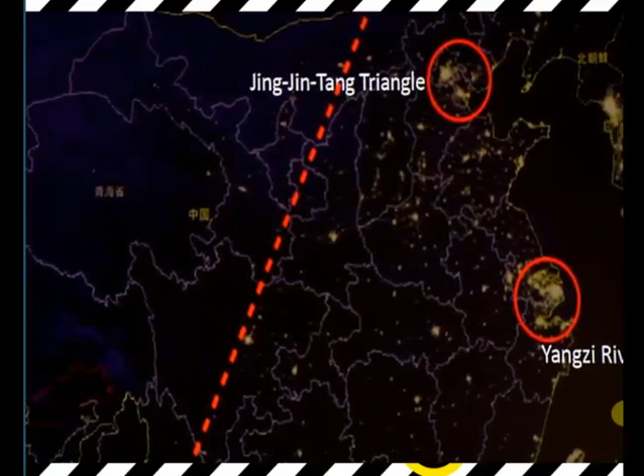Start from here. I would talk about this map. I also grabbed it from Google Earth. It very clearly can tell the situation in China geographically. You see this dash line actually divides China into the east part and the west part. And actually 70% of the people and also most of the major cities are located in the east side, and the west side is mostly wild land. So this is China, it's a reality.

And also we'll say almost half of the population, or 30% of the population, actually live along the coast, particularly three major regions. The top one is Beijing, Tianjin, Tangshan. It's a tri-city area. All the political, education, cultural, financial, everything is in the center, the strongest one. In the center, it's called the Yangzi River Delta, headed by the city called Shanghai. This one has the strongest economy because it has a very large group of cities, more than 40 of them. Most of them have populations close to 1 million. Of course, Shanghai has close to 20 million people.

And this one we call the Pearl River Delta area, which has several major cities. We heard a lot of talk about Hong Kong, a major one, and also the adjacent border city, which is called Shenzhen, where we are located, and to the west Guangzhou, Zhuhai, and Macau. There is also a city called Dongguan in between. So there's a very big economy, the strongest in China for its industrial part. The red part is the city called Shenzhen, and Hong Kong is right here.

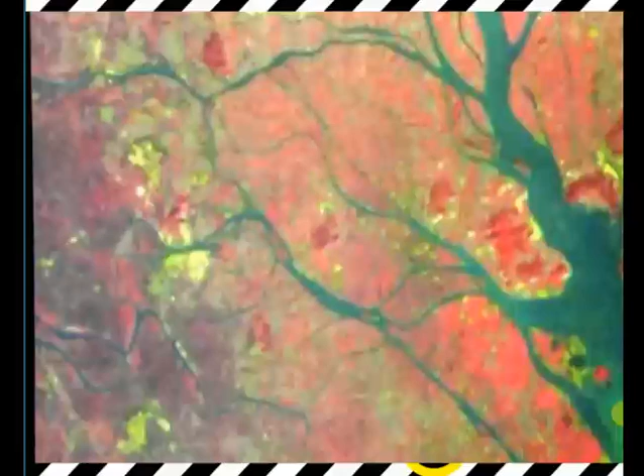I took this picture from the book, and it shows 1985. The yellow part is showing the urbanization for the whole Pearl River Delta. This is Shenzhen, it's very much developed, and this is the Guangzhou area.

When they finished the book, the time was 1995. You see Shenzhen has expanded its city boundary into the inland part, and the city also expanded along the Pearl River area. So I asked my guy to use a similar way to show what happens right now. You see Shenzhen is very much like this, and all the cities are actually connected.

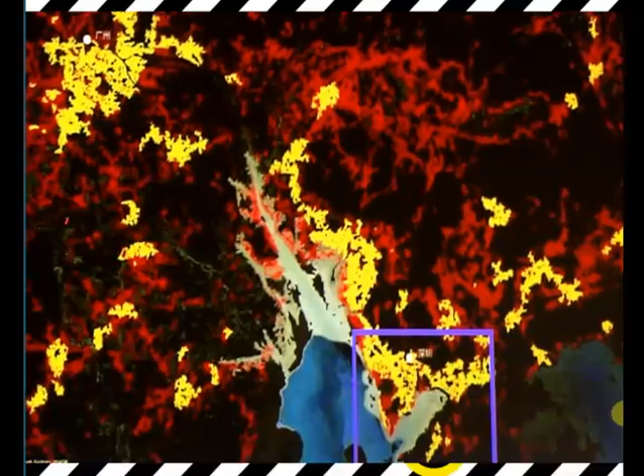Actually the red part is also early urbanized area. So it's again and again doing the thing. And then, enlarging this map to the Shenzhen area, this is Shenzhen, and this is actually Hong Kong. You see a large part of the land still remains undeveloped, but Shenzhen has covered almost everything.

When we zoom into this Shenzhen map, we'll see there is a lot of large development still going on. This is Hong Kong, the first border control area. Shenzhen was first developed in the 1980s and 1990s. The Luohu City Center in 1990 was the main center.

Then from that time on, it went west, and we founded this CBD in 2000 and started building it for like 15 years. It's almost done. Then it pushed into the Nanshan CBD, and right now we have a very aggressive plan for the Qianhai New Town, with 25 million square meters of construction to be done in almost 10 years. It's a tremendous work to do.

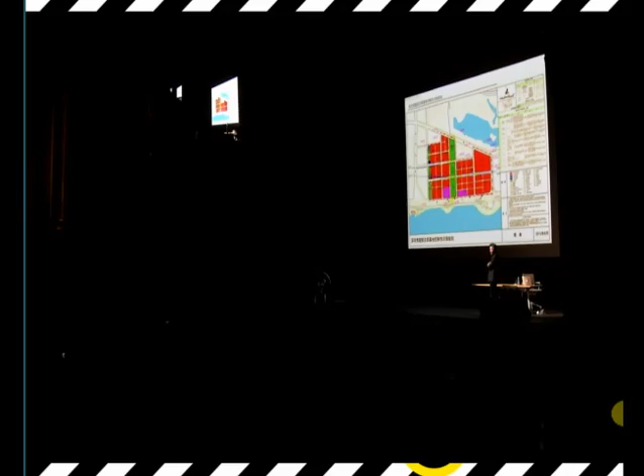This is some kind of fast, massive development, and it's still happening, and it's still strong. From day one when we set up the office, returning from the United States and coming to Shenzhen for the first job, we immediately found some very interesting phenomena. The urbanization is very strong and very obvious. So we started to observe the city constantly.

We call the very early phase the generic city phase. During the 1980s, it only had 500,000 registered people, and 10 years later it grew to 1.7 million. The large development started until 1997. We had already grown to 6 million people, and large infrastructure like highways started to be built in the city. So we had 9 million people at that time.

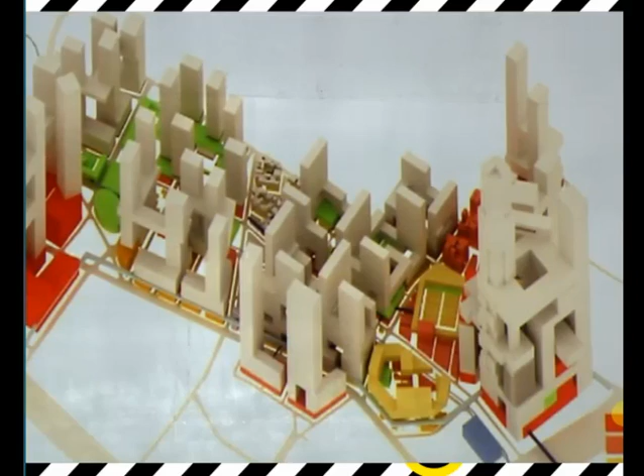The originally designated special economic zone area is already full. So the city started an urban regeneration period, which brings density problems. The city developed so fast; originally we thought we wouldn't get so many people in, so the FAR was set at 2.0 to 2.5. They thought that was already too dense, but right now there's a big issue: the government planning bureau doesn't actually limit any density.

They don't have a limit now. So they are starting to think, is it time for what's called a new density? What's the new density? Can we reach a density of 5? Or can we reach an FAR of 10, even higher? So this is something we keep thinking about.

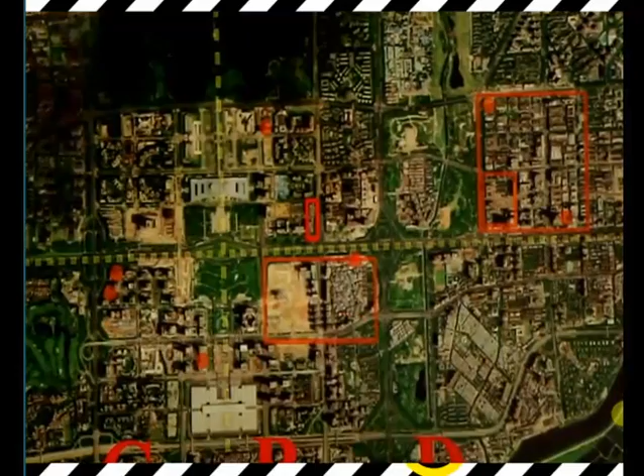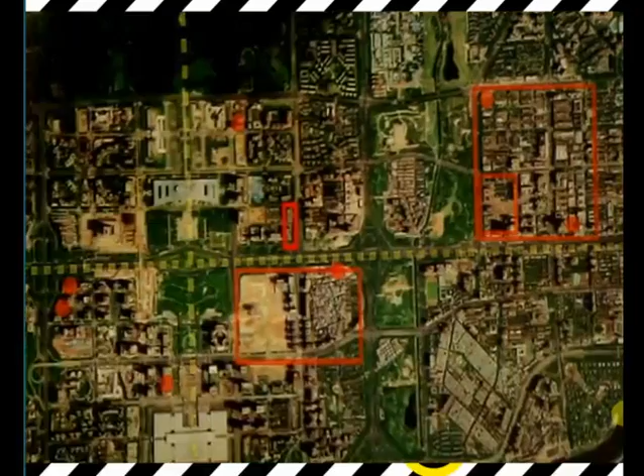I'll just take the central CBD area as an example. We did a lot of work on this one. The red dots are the buildings we have built; the rectangular lines are the places where we did urban design and some large building complex design. Most of them are finished or under construction. There's a central axis for the CBD, and there's a small hill, 100 meters tall, where you can actually overlook the CBD area.

The year 2000 was the second year we went to Shenzhen. You see, the CBD is empty. No one wanted any piece of land. No one believed this was going to happen. At that time, the planning said an FAR of 2.5. It is partly residential and mostly office buildings and government office buildings. The civic center was built 5 years later, with some museums and music halls, and some buildings started to be built.

At that time, I talked to the head of the planning bureau and said, probably this FAR is too low. I think 3 to 4 would probably prevail, because we know Manhattan and others all have very high FAR in that area. The guy said, no, we don't need it, that's enough. And then 10 years later, they raised every piece of land from an FAR of 4.0 to even 7. I personally did part of the urban design, which is designated for 7.0 now.

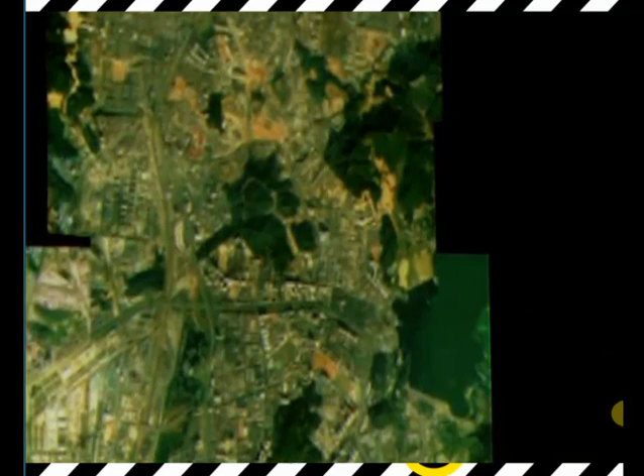So in year 2005, we started a study. We chose four villages to research what we can do to preserve this rich area. So this is the place we chose, just as the picture shows. And this is the one we selected in 2005. And when we had done the research, this was already gone.

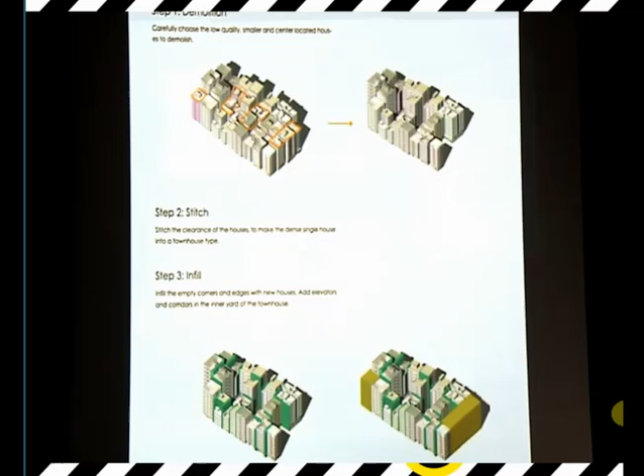And the way we thought is probably we can pick up the place. We can take off some of the buildings and make the buildings fill up those gaps, and also build something on the top of it, so that we maintain the same density, and also we can increase some FAR. Then we add a little bit, add a little elevator. Then we do some rooftop thing, and also we can develop a second

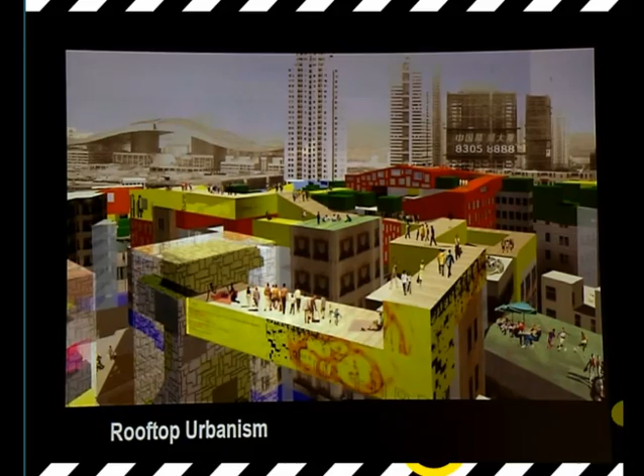fire exit route. So this is something we did all by our own. We call it rooftop urbanism. And we try to kind of make this a nicer area, so maybe we can preserve this area. But unfortunately, this is not going to happen year by year.

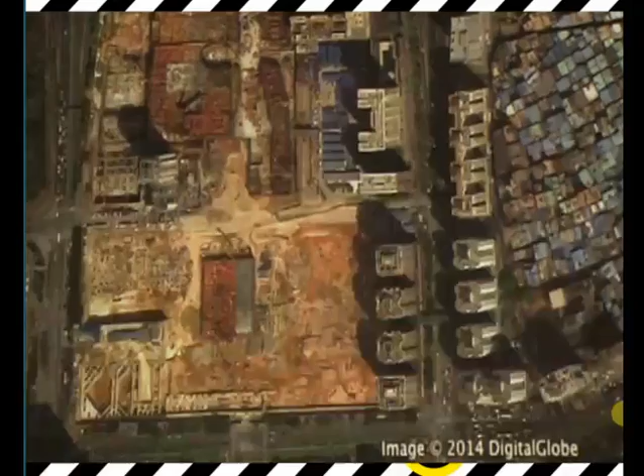So this is starting building two major shopping malls. Last year it was already done like that. So you see, the buildings have already gone up. It used to be a very low urban village, but the research actually gave us a lot of thought, and also we talked to lots of people about this one, and gave them some visual idea. Say, okay, what's going on? There used to be this kind of so rich and crowded area, suddenly it becomes the place no one will live in.

A couple million people will have to commute from the suburb into the city. There's no way. The subway and bus lines are already very crowded. This is not going to happen. And they are going to replace the urban village with those high, very ugly apartment buildings, and the high price.

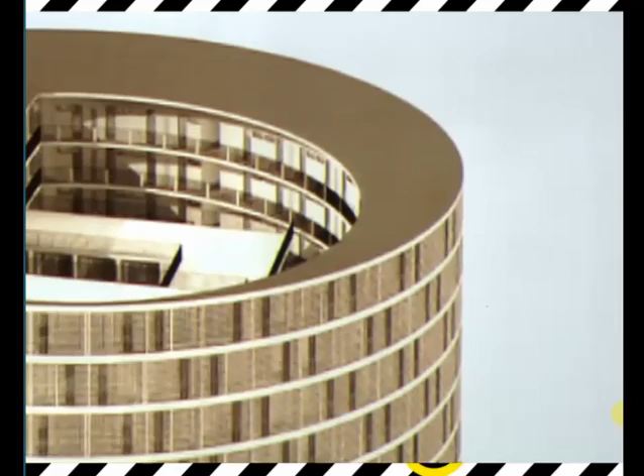And we continued to do the study and research, and finally we got a chance to find a project, actually a client, and I thought maybe we can borrow some of the old vernacular ideas, like this one called the Tulou in the southeast part of China. Very nice, very strong inner spirit, closed space. So this is very much like co-living, a collaborative kind of housing. It's very unique. So we thought maybe we can borrow this idea to see what we can do.

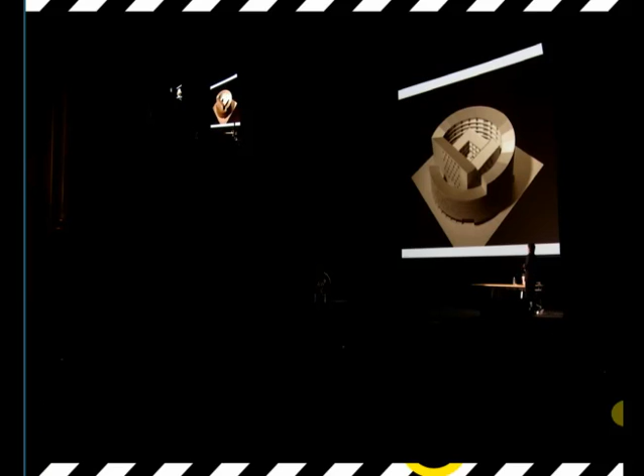So this is something we started, and we tried to combine the Tulou idea and the urban village's kind of chaotic, very rich life introduced into it. And we went through several rounds of imagination, and then we finalized the design, trying to do a very monolithic type of building. The reason is we think maybe this is something we can do, what we call colonize, or like copying this building into the city, in the city center.

So, for example, there's some government-controlled free area, like here, a leftover area. It doesn't have a very high land value. So we can build something like this. It doesn't really have a requirement of the environment. So we can build this kind of thing at a relatively cheaper price. So we finally get an FAR of 1.5.

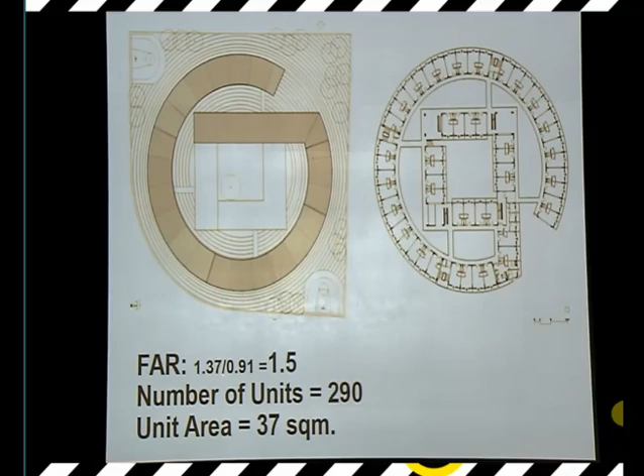But density is not just about the pure physical FAR. Actually, we got 290 units. Each unit, we counted, can house four people. So with 37 square meters, four people, two couples, share one unit. They have a separate bedroom. So this is already a big improvement. This is the typical floor plan we are developing.

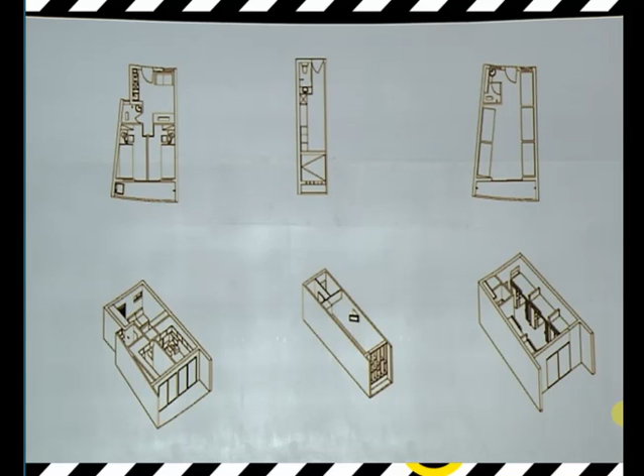The first project is for people coming to the city who want cheap rental housing. So this is what it looks like. From the top it very much resembles the traditional Tulou vernacular architecture, but we use modern ways of organizing everything. This is the entrance, so we introduced open space, open shops, and a community area.

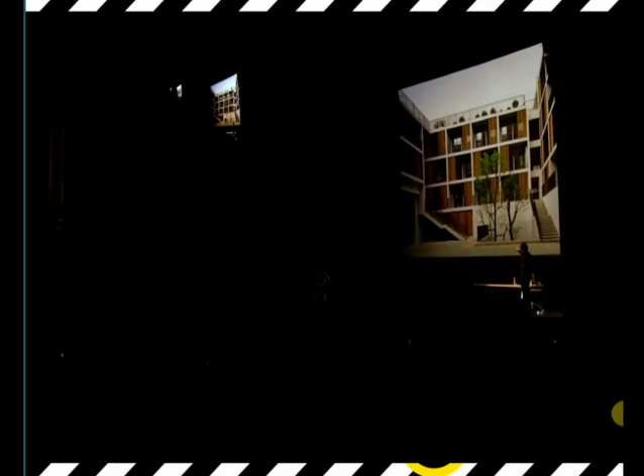This is the central courtyard, and these are pictures I took last month when I went back. You can see it's really full of life. The people seem happy living inside. Some people have been living here from the very beginning, and their children were born here. It's a very interesting area.

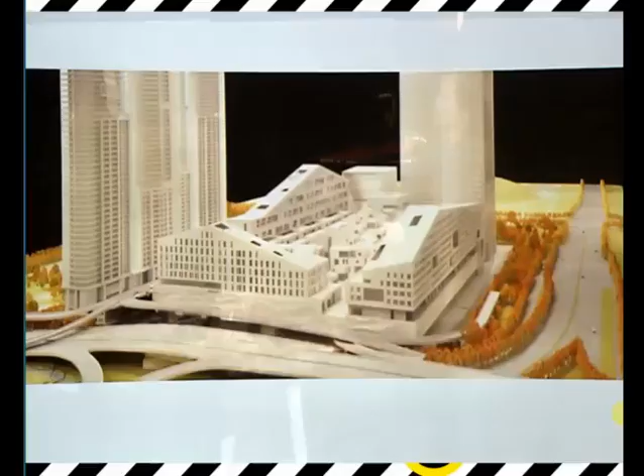Housing isn't the only thing we could do - what happens with a larger commercial complex development? This is something we designed two years ago, and now it's under construction, almost reaching the level shown here.

We got this commission - it's like SOM did these two big towers, this Hong Kong office did the residential, and this Miami firm called Arquitectonica did this shopping mall, with a footprint of about 30,000 square meters. So they can also build something on the rooftop of the shopping mall.

So this is the idea we got - it's right here. You can see the two parks already; it's situated between the two parks. This is very nice.

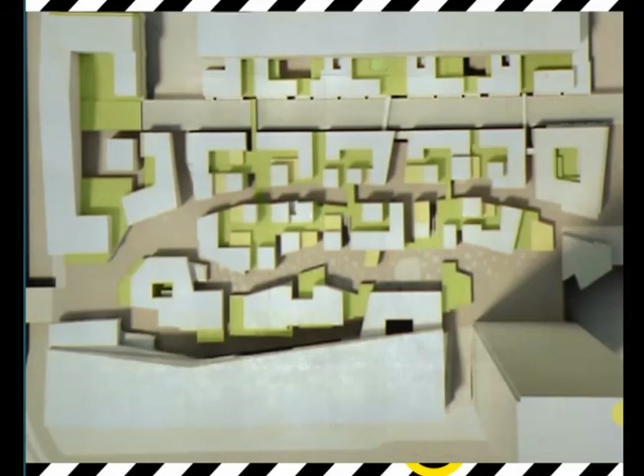We even have a two-story shopping mall that gives us the chance to bridge from the rooftop between two small hills. So we're making the central part like a small town, developing it as a Soho office building and commercial area, something like this.

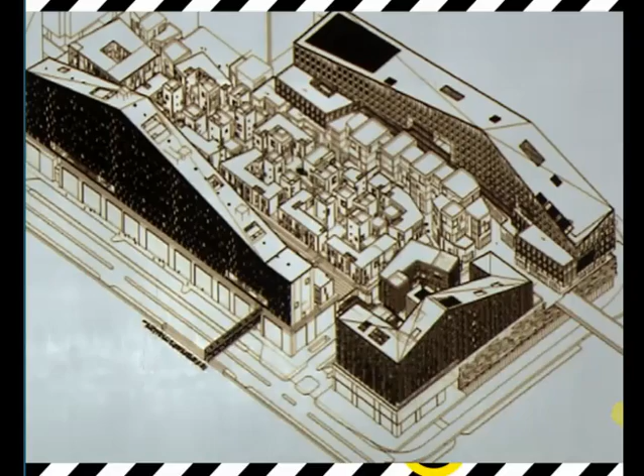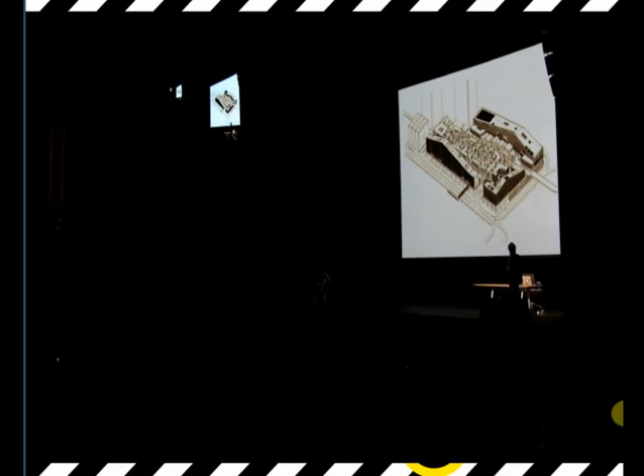This is what happened - we borrowed this urban village idea and tried to upgrade it into something better, even into a fancy place. You see this office building here, a hotel, and another office building that's a residential loft. This is a hotel, and in the center are small lofts and open-air shopping streets - a very rich kind of area.

We thought this is something that could only happen in China - once density reaches this requirement, they start building things on top of the shopping mall. You can clearly see this from the section - this is the third level. We have lots of different small-town-like things happening on top of it.

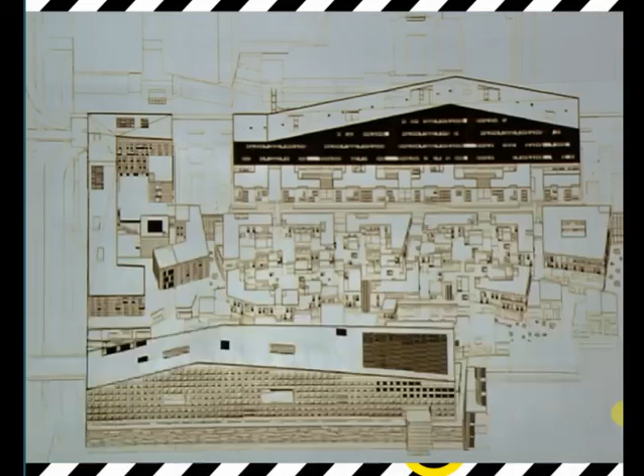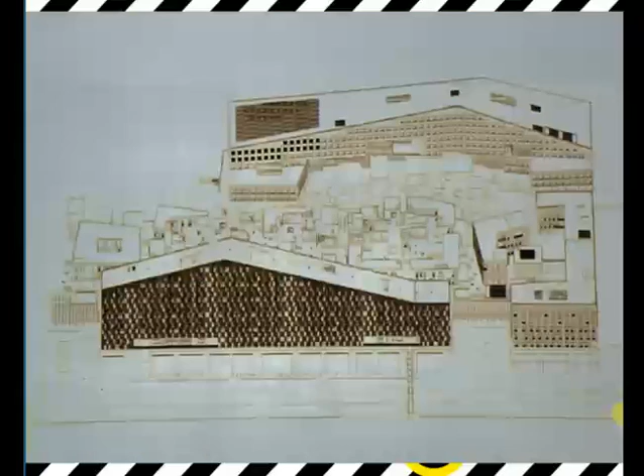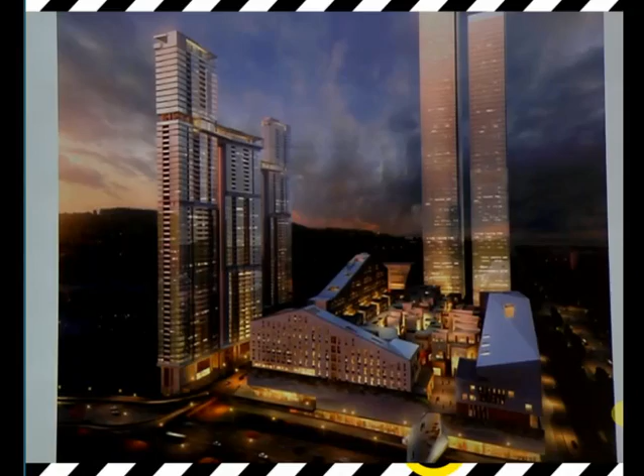So this is something we're working on - it's under construction already. We also developed a new building type, something we're really excited to see what happens with. We thought this experience was successful.

So we started thinking about large building complexes in already built-up areas. This is the area we're working on. The client came to us - they had already built a shopping mall and some other buildings, but thought the density wasn't high enough. They asked what density we could reach, and gave us this area to work with, where the shopping mall and other places are already settled.

This is more conventional. Further, we thought - this used to be a light industrial area with a lot of 5-story industrial buildings like this. So what if we stack them up, make them smaller, and combine them into a huge massing, something like this?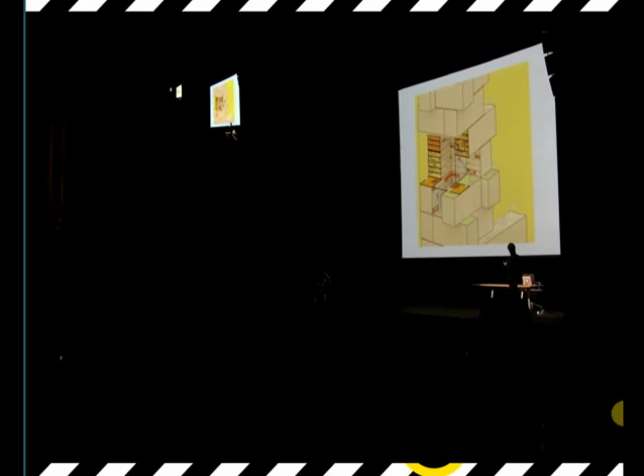Then we stack them together and think about public areas that can be built across levels, mixing residential with work and commercial space, creating a kind of sky lobby or sky atrium.

This is also a proposal. You see a lot of voids and atriums that can be put in here. Yeah, this is the second proposal we've done, and later we'll think maybe we can do something more simple and stronger.

So we did the third proposal called the Mega Tower. This is something where we have several different buildings instead of just a single building. Maybe we can put different building functions together. We can dig out different shapes of voids that become an atrium, an area, and enlarge the footprint, mostly combining 4 high-rise buildings together to form things like this.

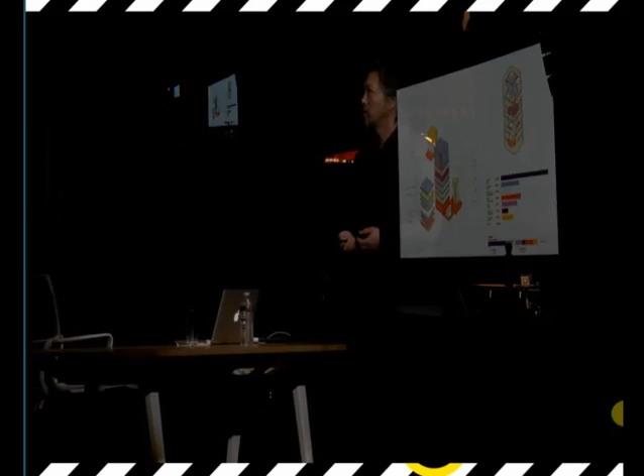So we have multiple different functions, and we use the buffer zone for public use, and also introduce a lot of social life. We try to do something like this. For example, we made this picture and said, okay, this is very high up, but it's quite nice. Maybe we can do this kind of life to solve the density problem, and also maintain the high quality of life and the work environment.

So this is something we've done the study and research on, gave to the client, and finally we got an exercise putting all the experience we have before together, and we got this large urban design proposal, and how to deal with a large urban village like this.

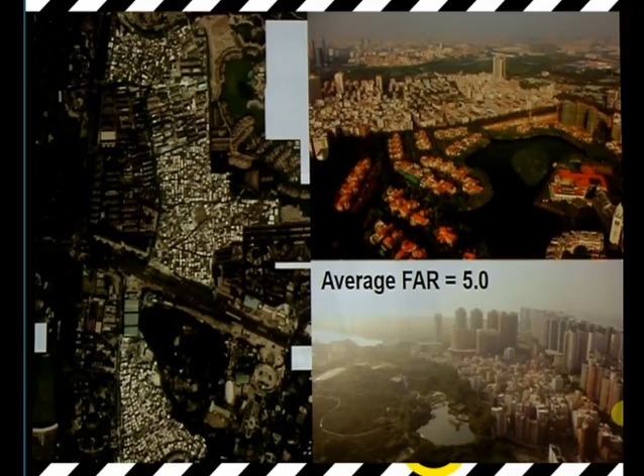This area is the highlighted area. It's called urban village. It's not totally developed yet, and it's already got a FAR of 5. The developer coming in tries to just demolish everything. They build something like this.

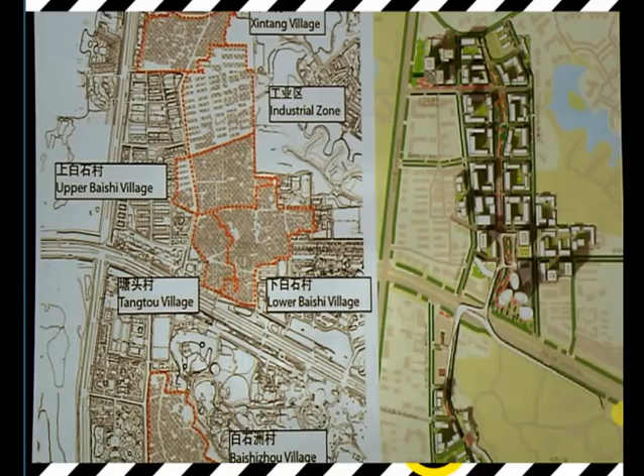This is the master plan done by a very famous American design firm. Yeah, this is going on.

And then we just ask the question: okay, for this type of development, what do you gain? What kind of problem can you solve? Of course you can solve the GFA needs, large area you can do, but what you cannot do is continue the cultural context.

You cannot think about social upgrade with this kind of master plan. And of course, you cannot have diverse functions like the urban villages used to have.

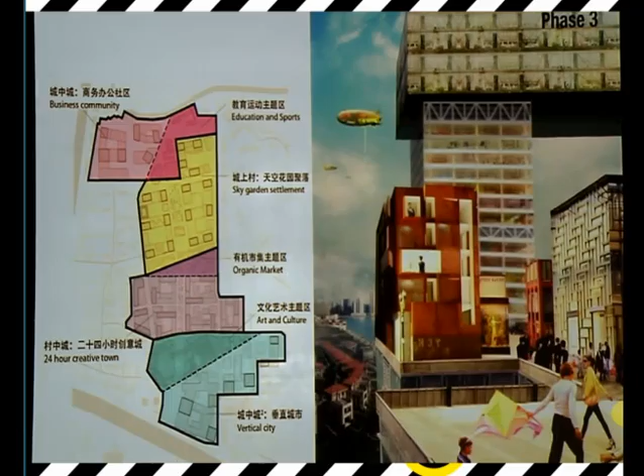So this is the proposal we gave them: divide the whole area on the north part into 5 different zones. Every zone we leave a slice of area to maintain the urban village, some kind of structure untouched, and try to build higher density in the buildable area.

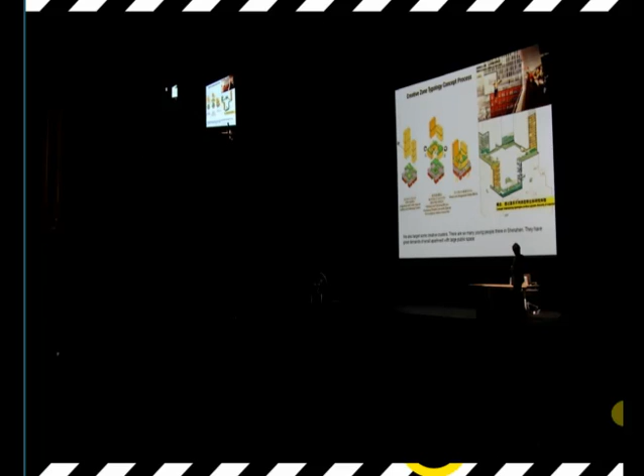This is something we really want to do—actually raise the residential building up into the sky, so people can still maintain their traditional type of lifestyle. This is something we actually thought about, with different levels of public area we can use.

Sorry, I'm a little bit over, but almost done. So the red part is commercial, purple is the working area, and on the top we can put apartments and housing to get the maximum sunlight.

Then we push that kind of density to like 10 to 15, and we can preserve something like this—very nicely done. We really, really want this one to remain as history. People are there, so we can build something surrounded, and use the old building to build something new, making a creative zone.

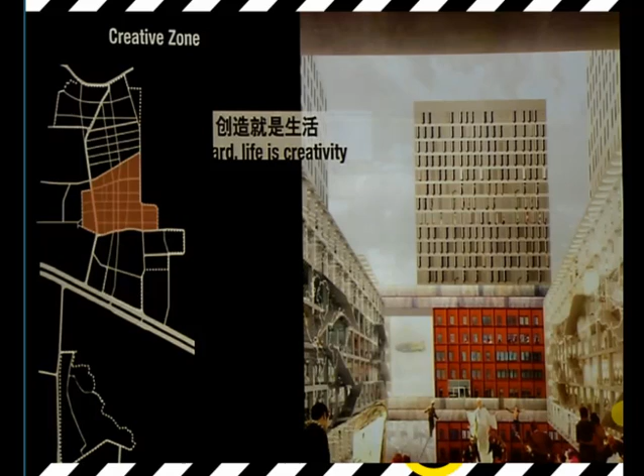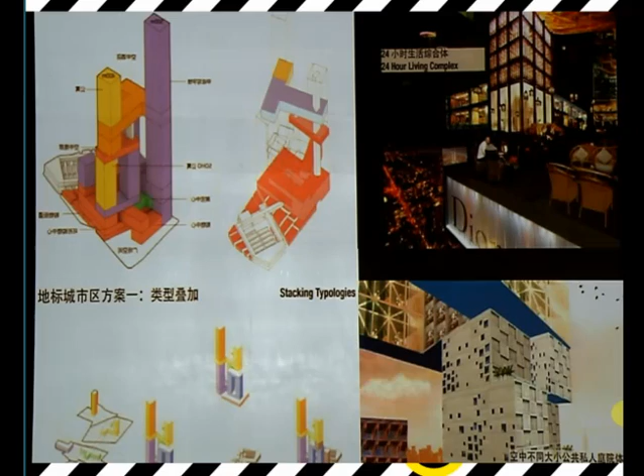We try to do this to convince the client: okay, we can preserve something. Actually this is much better than just wiping out the whole thing and building something with nothing special. This is going to give us a lot of character.

In the end, we selected the area to build super high density, borrowing the mega structure, mega city kind of idea. We were still trying to develop this idea—putting different buildings and bonding them together. Later we have to solve some technical problems: elevators, storage, power, those kinds of things. But people can have their own different functions, and they can enjoy some kind of thing below, on the ground.

Actually the technology, the needs, everything is ready. So this is something maybe we try to push forward. And yeah, this is about it. Thank you very much.